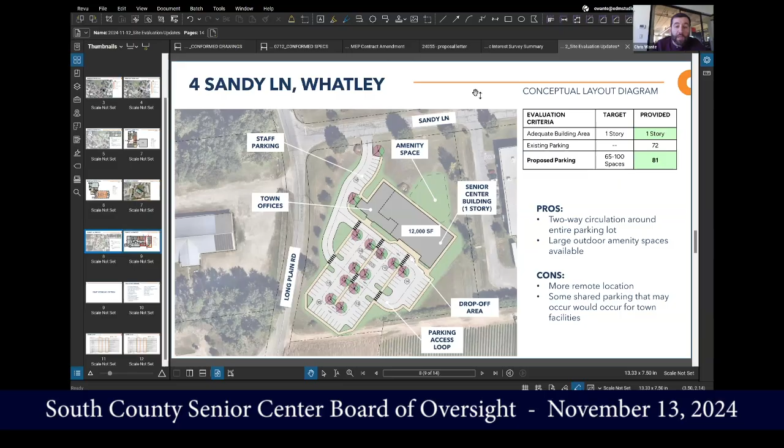I know that's now in question, but we were looking at past projects, looking at the spaces we thought we needed out of this medium category, and trying to figure out, based on other projects we worked on, giving you the spaces that are in the medium category while still making them viable, but maybe not as large as the original program called for.

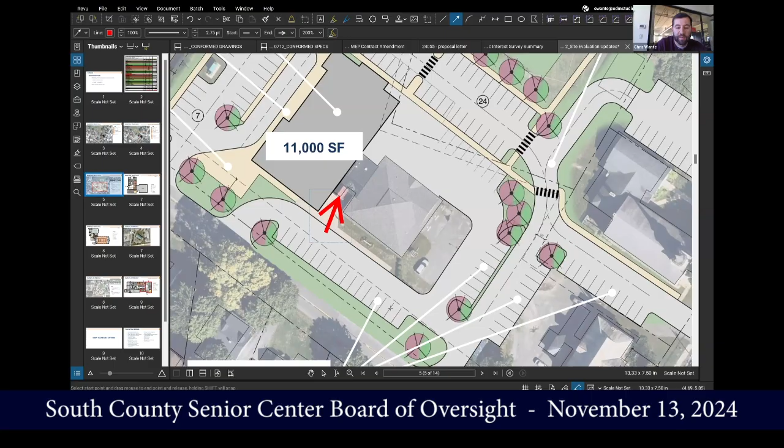Okay, I think right now the entrance to the town hall and police department is right about here. I think there'd have to be some reworking of that entry, but the point is we could keep the police station entry here with public parking here. Can we lose some of these spaces and pull this curb cut back a little bit? I think isolating, just because of the function of the police department, would be important.

So is there a row of bushes or trees here to give a little more privacy? Is there a connection through this lot here, so it's not a kind of dead end? And does that change how they access the parking? I think we can coordinate and look at all that stuff.

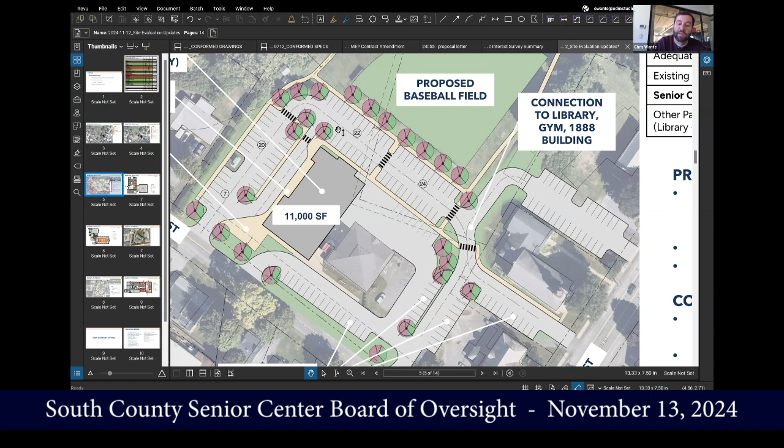But I think the main point is that based on our understanding of the functions of the buildings, this police station area would want to function on an island, a bit isolated. A rec center directly adjacent to a police department isn't ideal in terms of project use type. But I think how we treat the perimeter of the police department parcel will go a long way in giving the senior center its own identity along the back area here, facing the ball field, which could be nice. It could be a nice green space that the senior center looks towards, but it's not usable green space for us.

Well, not yet. That was part of my question to you guys - I don't know how well used that ball field is. And does the ball field need to remain a ball field? Can it just be a town green space?

You know, has there been any other conversations about that green area? There's been discussion about like moving the ball field and putting senior housing there, that kind of thing, at one point.

A lot of people love that ball field. However, there is another ball field right next to the elementary school that doesn't get used as much and could get remodeled and be the more predominant field. That's an option. I'd have to talk to the rec department and all that, but if it's getting too crowded here, we might be able to move it over to the field that's not used as much, enhance that field, and open this up for space for the senior center, for the town hall, for other events too.

Is that a 2-story, the 11,000 square foot one, is it 1-story or 2-story? That's one story. And we have ability to go up if we'd want to.

So I think in the context of the broader discussion here with the larger building, if we left here saying, thanks for looking at that, but no, we don't like that smaller footprint, we need a larger facility, we would, as you can see, just based on how tight things are getting, have to add parking to accommodate that additional user base to meet the program. And adding square footage, we're going to have to go up. So those are the two challenges.

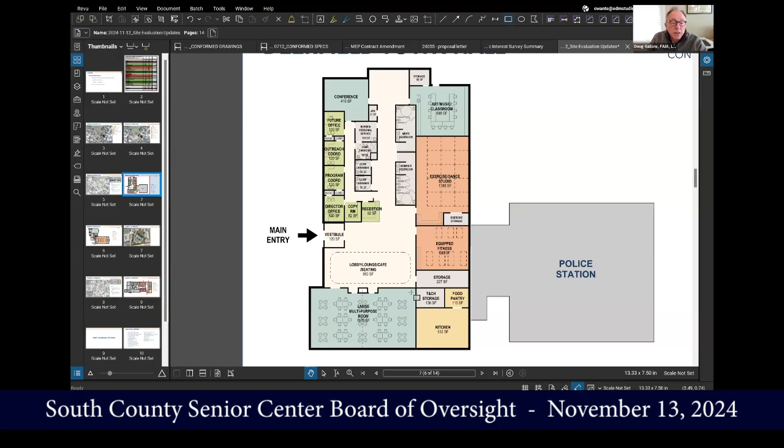Can you make that bigger, Doug, please? Thank you. Chris, good, thank you.

Again, trying to think about the orientation of what's on the site as well, this would give us a corner with some nice windows. There is some patio opportunity out front and on the street side of the site for the large multi-purpose room. We're showing the large multi-purpose room dividable, so you've got the opportunity to make 2 smaller spaces in that regard, being served by the kitchen behind it, with the food pantry and the table and chair storage that comes into the large multi-purpose room, so when you're moving furniture around you've got that access right there.

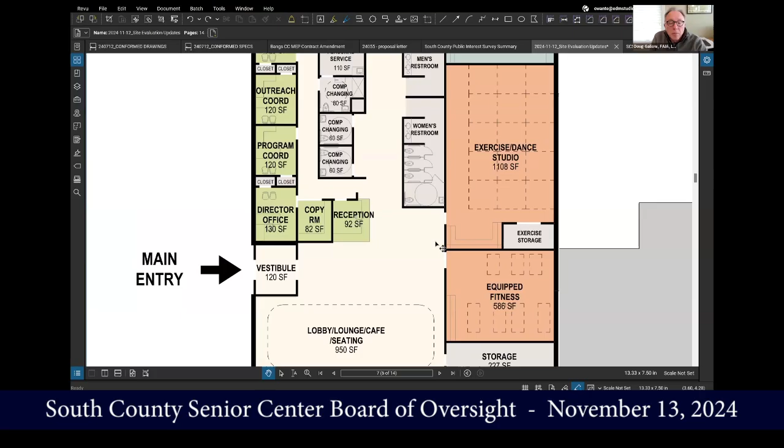When you're in the main lobby lounge area, the first activity space in front of you is the equipped fitness room. We ended up with 8 pieces of equipment and some stretching area. I think in the larger plan we had 10 to 12 pieces of equipment. The one thing we were looking at here was the fact that along the right edge of this building was the police station and the police parking area behind the building, so we were looking at creating spaces that weren't critical to have windows.

The thought was that probably the equipped fitness room could be glass across the front, trying to make the lobby lounge as bright as possible, maybe with even some overhead daylighting, which would get daylighting into that equipped fitness room. We've set up the office suite again along the front face of the building.

Come into the office suite, we've got the offices, and we've got connectivity to a conference room within the office suite, but that conference room is also connected to the public circulation, so it can be used both as an activity space and for office use.

We've provided the nurses' personal services room that's accessible both from the office suite and from the public side. We've also made that companion restroom in the nurses' suite accessible from the office. So in the compromise of not having a staff toilet room, we have access from the suite into that companion restroom.

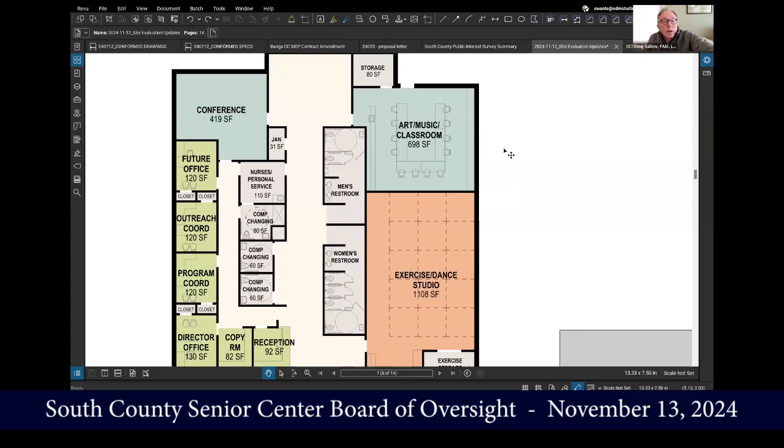And then at the end of the hallway would be an open lounge space, which could be glass, ends up being a nice destination, which visually shortens the hallway. We could have windows across that area, and even doors. Well, we would need doors for exiting purposes, but we could also have doors to get out to the outside there. So this is about 11,000 square feet.

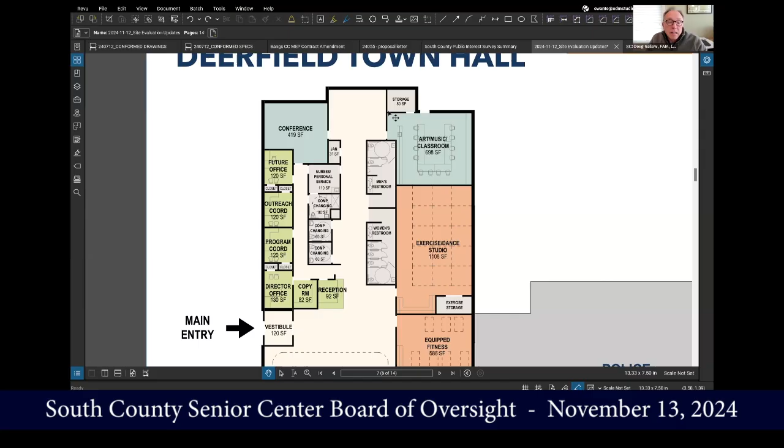As Chris was saying, we've got 72 parking spaces. That's in the realm of acceptance for 11,000 square feet. There's overflow on site, but I think the overflow on site with regard to parking is going to flow both directions, depending on what activities are going on around the site.

To go to a second story, what gets lost on the first floor is we've got to make space for the elevator and stairways, and we'd have to have 2 stairs. That would take some of these rooms, or make the decision as to what's upstairs and what's downstairs. But the impact of that, as Chris said, if we end up going to 15,000 square feet, we're significantly short on parking. And that's the impact of this site.

So the real question in that regard, and the concerns you've expressed, is, does this site work for anything larger than an 11,000 square foot building?

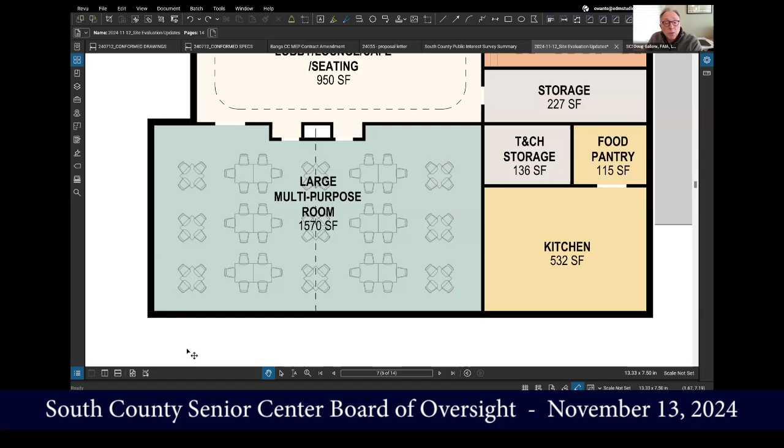The other thing you were talking about was the large multi-purpose room, identified originally in the program at 2,400 square feet, calculated to hold 120 people in banquet style seating. At 1,600 or 1,570, we're down to about 80 people in banquet seating in that large multi-purpose room. And then you've already expressed your concern about the size of the kitchen based on the production size of what that kitchen can provide.

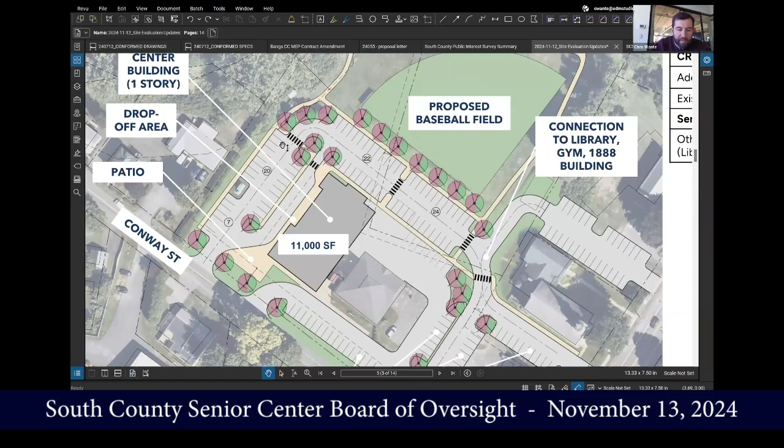Doug, what's the number of added spots for this added parking? There's 73 specifically dedicated to the senior center. Thanks. Oh, I'm sorry, it's right there. Yep, yeah, thank you, sorry. That's basically this front lot here, and then the 2 side lots. Those are what we are calling the senior center parking in this little chart here.

Can we go back to the layout, please? So first, one of the issues we expressed in the beginning of this project was we wanted a room dedicated solely for food purposes, like for meals, because one of the issues we don't want to have is to continuously roll out tables, put tables away, roll out tables, put tables away. So that's giving us one main room of 1,570 square feet to continuously change up.

So we can't have multi-purpose space for certain things if we wanted to do that. I think the equipped fitness space, Hadley has what, 5 pieces of exercise equipment. So you got space for 8, or is it 4 pieces of equipment and then stretching space?

No, it's 8 pieces. So I think we would take away 3 spaces because a 532 square foot kitchen is not big enough, I'm going to tell you that right now, for the capacity of what we need. We need a space for storage, like for what we're working out of here, and even over at some of the church space that we rented for a while, that was not big enough.

We were tripping over each other, and a food pantry isn't—I don't want it to be a closet. I want it to be accessible. The whole goal is so people from the community who need to go through it can go through and feel empowered to choose their own food. So it's not just a closet to put food, it's an open space for people to walk through to have access to.

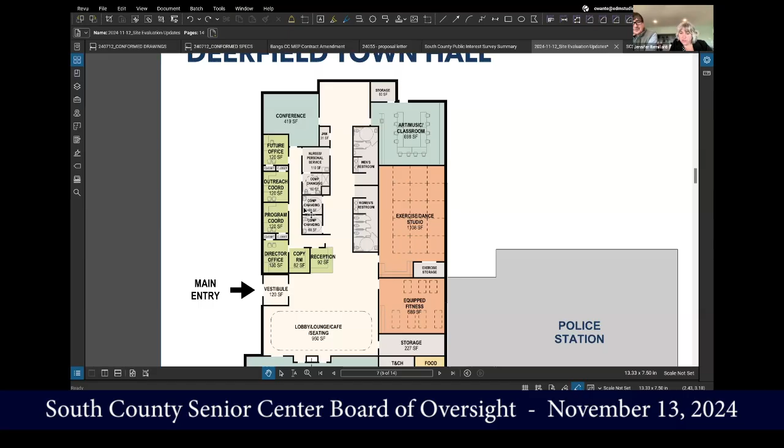If you scroll back up, I think that's a big waste of space at the top. There's nothing there—a janitor's closet so far from the kitchen and other things where you'd really need one. I think that should be closer to that, maybe near the bathroom. So maybe move it to the other side, down, more centralized.

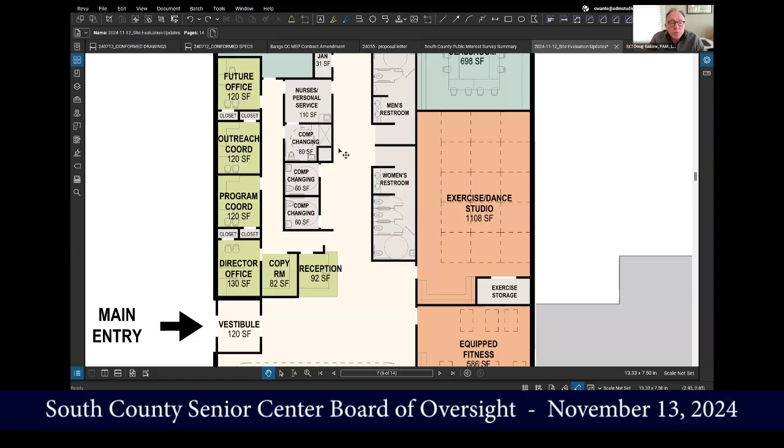And there's 3 companion changing rooms. I understand the one next to the nurse's space, but why do we have 2 extras if that was for the staff bathroom? Well, those are companion restrooms—they're large enough to be changing spaces if you want those, but those are private restrooms.

Yeah, I think we would only need 1 or 2 max. We don't need 3.

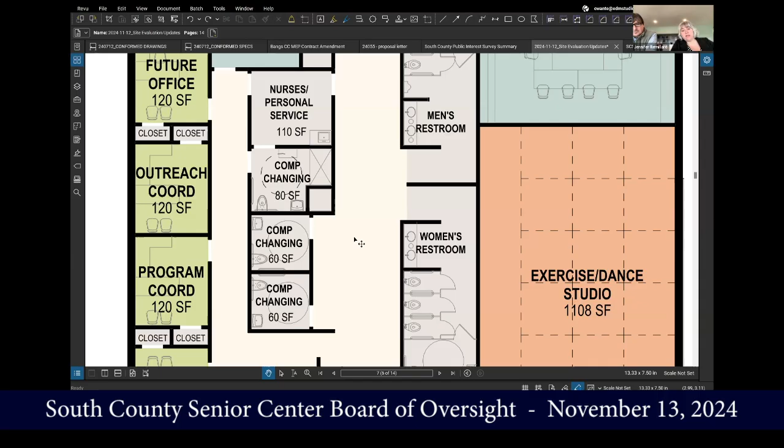But the nurse's restroom is a restroom with a shower connected to the nurse's suite. Yep, but she's maybe not there every day, so we could use that companion changing room for accessibility regularly, because Nikki over at the Hadley Senior Center specifically said that having one that's just off to the side was a waste of space. Want that accessible to the public side, as you're saying?

Yeah, I don't understand why it can't be accessible. I mean, people... yeah, okay, so that should be accessible to the public. Because the nurse is only there 3 days a week, and only for 3 hours each day, so I don't foresee that not being open to the community. If we have an accident or someone who needs to go in and change, that should be open anyway. Just my thought.

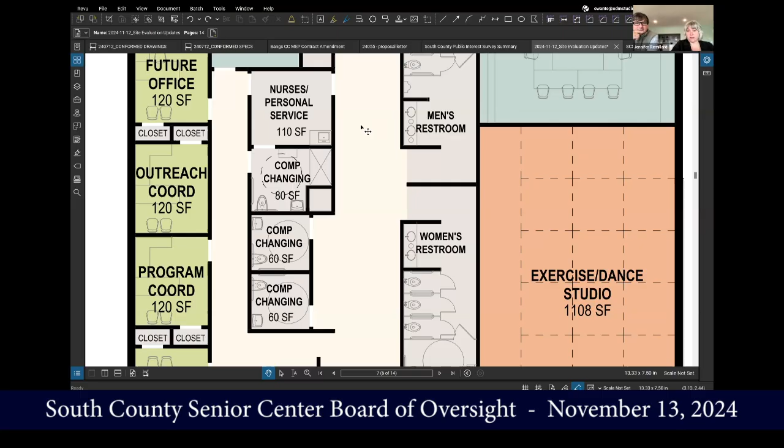Mechanicals for this—are they on the roof or something, what are you thinking? For all the air handlers, yeah, we were thinking mostly on the roof. We'll probably need to carve out a small space somewhere for a boiler and electrical panel, but most of the stuff we're thinking will go up on the roof. Okay, this is too small. Alright, well, we're hearing what this would be, and then we'll address it.

So going over, staying at the town hall site, one of the things we've heard many times at the public outreach was, what are we doing with the church? So we wanted to at least look at the church from a high level standpoint, to say what could you guys do with the church, and how could it maybe benefit the community. We don't think we have to take it any further than this, but we wanted to ask, if we're not touching the church for the senior center specifically, is there anything beneficial for the community at large?

So just looking at it, trying to say what makes sense for the church, what could fit. We wanted to dash in the activity we heard a lot about at the public outreach event, which was pickleball. So if the sanctuary turned into a gymnasium, how would that fit different activities? It's definitely too small to fit a basketball court—it doesn't have the width. You could definitely put a hoop up here, but from a pickleball standpoint, we dashed in the rough size of a pickleball court, so you could technically fit something like that in here.

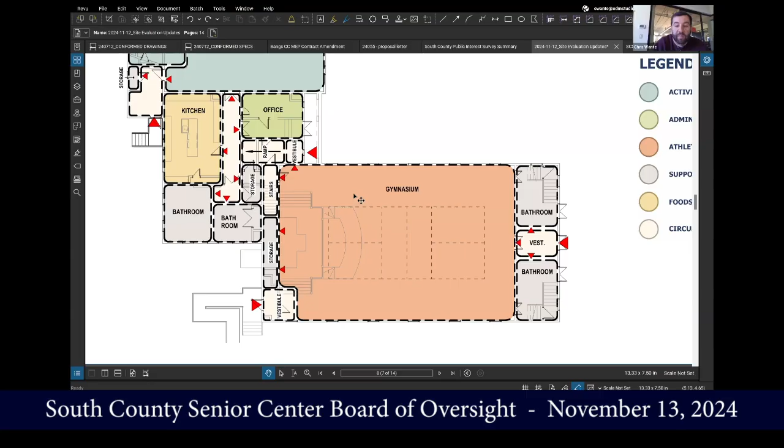The challenge with this building is the accessibility to the different sides of the building, from the church proper to the annex, and bathrooms. If you start to make these more permanent, large assembly spaces, you need to meet the bathroom requirements. So just looking at, if we got rid of that mezzanine level upstairs, which would take a significant structural upgrade to even make functional, if that whole mezzanine comes down and it's a big wide open space, you get rid of the stairs here.

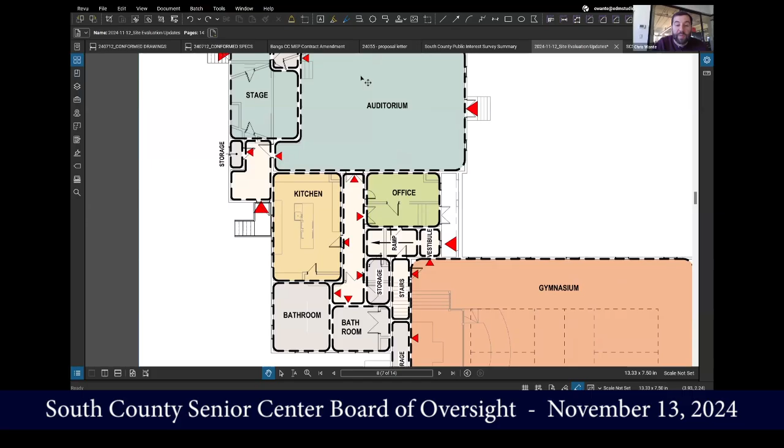We have a crawl space below, so it wouldn't be too big of a deal to add some restrooms up front here and keep your main entry at the front. So just looking at, super high level, what spaces would go where, how could you make this into a usable community space. And then over on the annex side, keeping the auditorium with the stage makes some sense. If it's beneficial to the town, it could be one large wide open space.

If you didn't want the stage, but if you kept the stage, we would have to add a lift. So looking at what it means to add a bit of an accessibility lift.

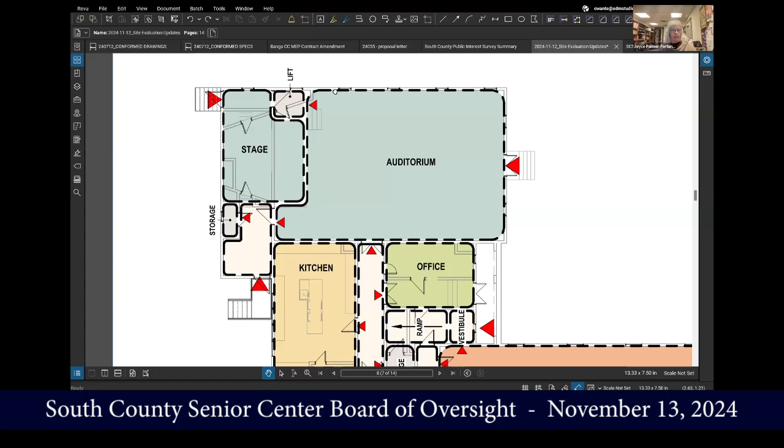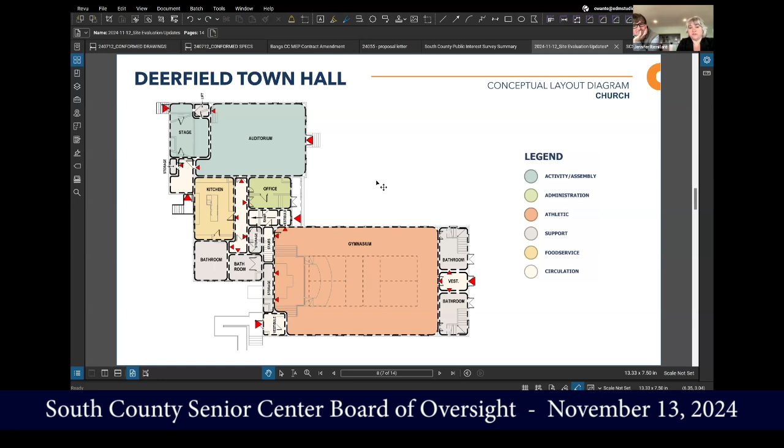Brian, you want to zoom through the Whately site? I would like to spend the appropriate amount of time on the Whately site. Yes, we will talk about the Whately site.

Wanted to pull this up bigger. So, as Chris mentioned, we had the addition onto this current building. As far as circulation and coming into the site, we're still maintaining the Sandy Lane entrance. As you come in, we figured there could be an opportunity for some staff parking spaces right there up against the building. But as you come in, you'd do a circular motion to come and drop off from the passenger side at the front door. The front door here is where we're showing that drop-off arrow, right where Chris has drawn.

We reformat this parking lot as well to accommodate a more senior center friendly parking scenario, where they walk down a couple main sidewalks right adjacent to the car to get to the front door. The nice benefit here is that when things get reworked and we have our senior center off to the right, there is some flexibility for outdoor spaces, whether it be a patio off the right side or amenities in the back, as we approach our parking target.

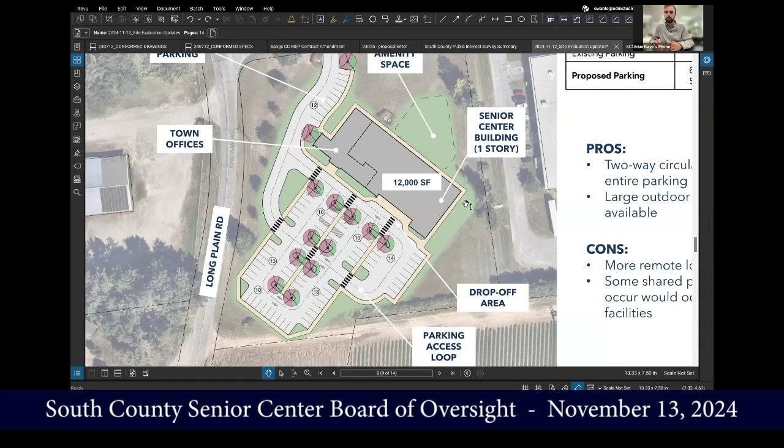Again, I think we highlighted 65 to 100 spaces for this, but this is kind of what we are considering here. This dotted line represents space to the left as town hall space, and the space to the right would be what the senior center would be utilizing. So flipping over to the plan here.

So looking at the layout here, one of the advantages we have with this site is the opportunity for windows on all three sides. And in looking at this, similar approach to the vestibule, we've moved a large multi-purpose room to the back corner, which has also increased in size.

One of the biggest issues we had with this building was the fact that the existing building has two different levels. And what we've determined is, rather than deal with those two different levels, we were going to infill the lower level up to the main level of the building. So with regard to grading and then infilling above, building on top of the lower level, which is that loading dock area, the addition gives us the large multipurpose room. The large multipurpose room is positioned in this location because there are columns in the rest of the building.

And so to have a column-free large multipurpose room, that had to be outside of the footprint. So the red dotted line is the physical addition, and everything to the right or left of that is existing building. The purple slashed area is the floor infill that has to be raised up to that level. So again, we've got the office suite, same components.

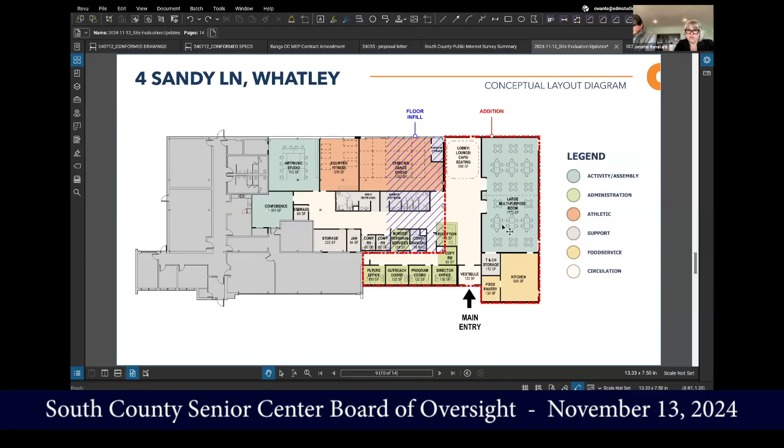But yeah, I think the kitchen's too small. That's number one. Number two, on the feedback surveys that I read through, the biggest commentary was people don't come as frequently because it's not one singular space. I think once we have a larger space, we're going to get additional folks in, and we need the space to accommodate them.

And here we're left with one large multipurpose room again. How many people can fit in each segment of that room with the way you have the tables laid out there? Let me just look at capacity real quickly here. We can get about 85 on both sides. Let me just make sure here.

Hold on. Because I can tell you right now, one of the big things people want is a congregate meal daily, which we have not been able to offer because we don't have the space. And when we were renting the church, we weren't allowed to use all the equipment in the kitchen. So even if we got 50 to 75 people daily, I'd want to keep one space where it's constantly set up as a kitchen area or whatnot.

Yeah, you're only going to get about 85 people total in this area. The divide can happen anywhere, but the short answer is the 2,400 square feet that was in the original program is what you need to meet.

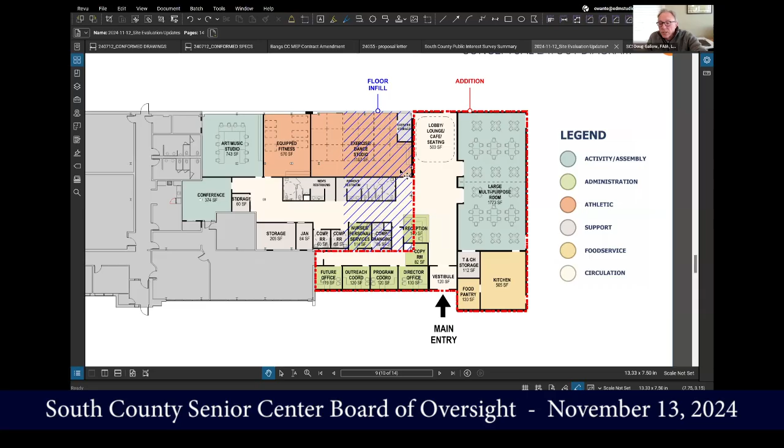One of the biggest disappointing issues, and we've talked about this again and again, is even if we go larger on Whately's site, you're still not going to have room for the parking. And that again is problematic. So if we go to 15,000 square feet, we're going to want an additional 30 parking spaces or 25 parking spaces, and this site doesn't lend itself to that.

How much acreage do you need for parking and a 15,000 square foot building? What's the plot size, if it's a blank square? Is it that it just doesn't fit on this property at all, or if this property had nothing on it, can you accommodate it? If this property didn't have anything on it, we would easily be able to put the original program size building and parking on this site.

That's what I was curious about. Brian, do you agree with that statement? Yeah, I agree. And just to answer your question, for about 100 parking spaces, we factor in about 500 square feet per space, so that's about an acre, slightly over an acre, but for your consideration I think that's right.

Just ballpark ideas. But there are also places on this picture, as I'm looking at it, that are not being used. There's the bottom right corner, for example. If the building were expanded, presumably it can go there. Also on the top edge where the words amenity space are sitting is another flat, non-prime agricultural land that drains really well, so if needed, parking could go there.

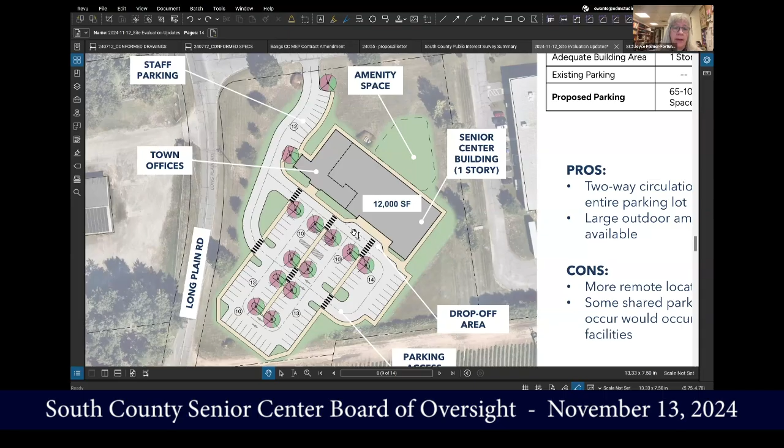I'm just saying there is space that's not being utilized right now in this design, and if making the building a bit bigger means a bit more parking, then there kind of is space. I don't know that a space behind the building wouldn't actually serve the staff as easily, since I think there's a door down at the end, possibly an entrance for the town offices on that backside.

So that might be the more natural place for staff to park. I guess, in my head, I'm still getting over the fact that we all agreed we asked the Deerfield Board of Selectmen to ask for the real plan, and somehow that will of the Deerfield Select Board was thwarted, and we're not looking at what I thought I was going to look at today. I just got to put that out there, it's still messing with my head.

Maybe in secret the Deerfield Board of Selectmen voted to do this, but I don't think that's the case. Absolutely not. So somewhere within the Deerfield town offices, someone is making decisions who's not the Board of Selectmen or the Board of Oversight, and they're doing it without input from the Board of Oversight and the Senior Center Director. So yeah, I'm pissed about that. I'll probably take the blame on that one.

Because Chris, when you came in and did the open house with the community, we had the space for Whately at a larger scale with a different design, and you even shared that with us previously as preliminary. So it's great that Deerfield wants to shrink the footprint, or whatever, or somebody in Deerfield did, because you don't want to loop all of Deerfield into this.

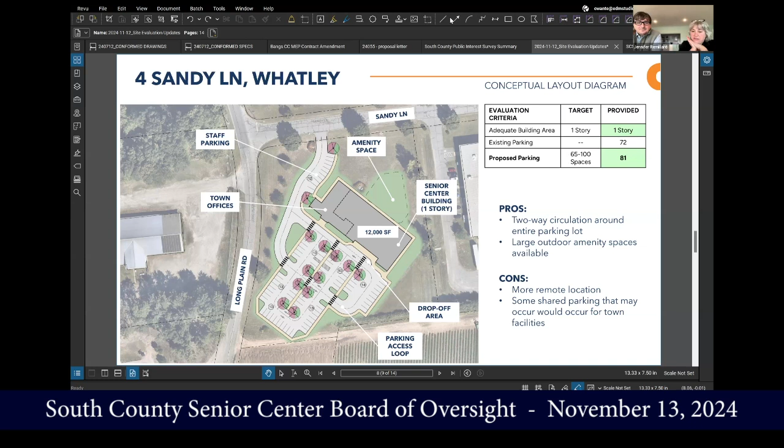So just to ask, if I'm going to move forward and do community meetings and show what the needs are, with the list of what we came up with, the high and medium priorities, I guess my concern at this point is how to do that. And I had a quick question just to jump in before that. Sure, we've got these two ideas.

Do you have ballpark budgets on these, or is this just design at the moment? This was just concept stuff. We weren't saying this is the be all end all. This was just the next step in the process.

So, like you said, I think it's not a bad exercise. We haven't lost anything to know what this is. But I feel like the tenor is that we want to see—can either of these properties get what we want?